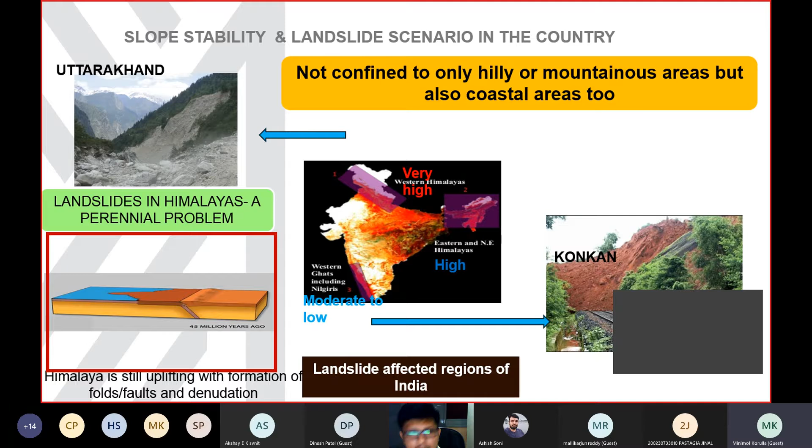Then we have challenging slopes in the Konkan region and in South India, especially the coastal slopes. Here the height may be less than in the Himalayan situation, but the soil properties are equally complex. And even within the northeast or northwest, when we move from place to place, we will again see special characteristics.

So hence, no guideline or code can really standardize 100% of the characteristics of these slopes, and we will not be able to define a ready-made solution applicable to a particular category, because from place to place the conditions differ in terms of the soil strata, the geological behaviors, the geotechnical characteristics, the load combinations.

These are photos. I'm sure you may not be able to see them closely, but it is very important when we talk about any slope instability to get maximum visuals. A site visit is required, but nowadays we can get a lot of very good digital images, and those can be used to understand a project deeply. So we can see landslides in Mizoram, Arunachal Pradesh, Assam, and Sikkim. Even in adjacent states, each place has some difference in characteristics. So when we go to a site, we need to collect as many photos, videos, and digital images as possible.

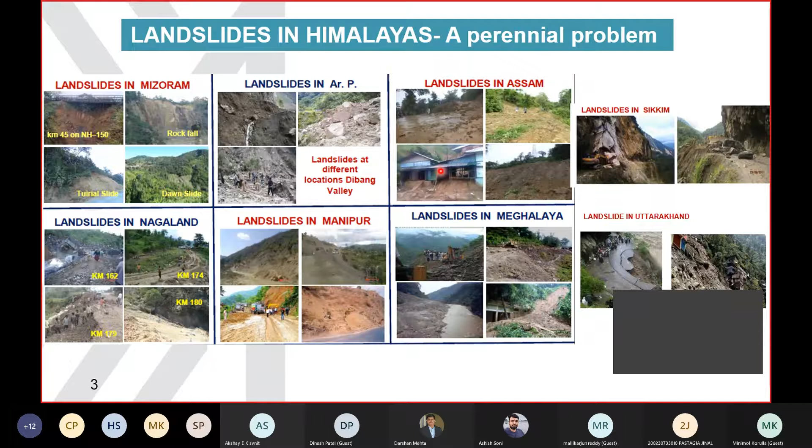So this is an example of a Himalayan landslide. This is a place called Lambagad in Uttarakhand. Uttarakhand is the Devbhumi, where nature is at the peak of its beauty. If we move through that place, we will feel that heavenly beauty. But at the same time, we feel the instability of the mighty Himalaya very much there, because everywhere we feel that we are walking on unstable ground.

So here, if you are watching closely, we can see a number of slopes, where my cursor is moving. There are hills, and what we are seeing is a river bed which has a lot of debris lying in the bed. And you may be able to see that a road is passing on one side. The hill is there, and the other side is the riverbank slope.

And if we are closely looking, a number of slopes can be seen. And if I describe in terms of slope stability, I will say that at present, from this photo, none of these slopes are stable. And what are the challenging forces we are seeing there? First of all, the height is quite high. The height is really quite big. Second, the steepness, the angle of slope, that really makes it unstable.

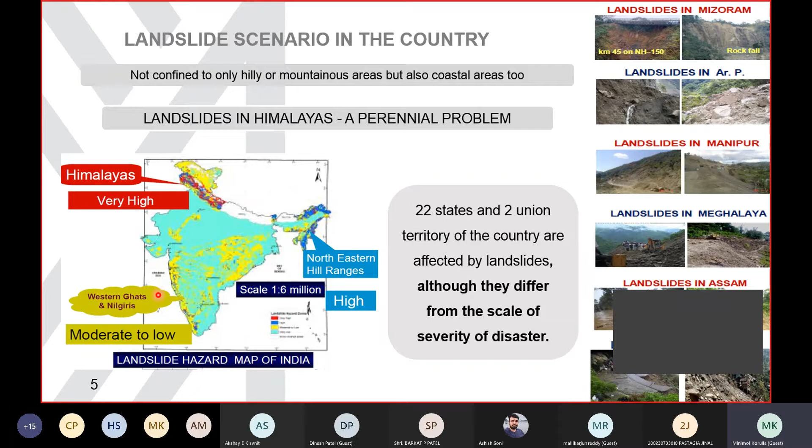So when we talk about the landslide scenario of the whole country, 22 states and 2 union territories of the country are affected by landslides, although they differ in the scale of severity of the disaster. And usually there are several classifications, but based on the hazard zoning, we can tell that the Himalayan states are the highest hazard zonation. Then the second category may be the northeastern hill ranges, which we can categorize as high, and for the Western Ghats and Nilgiris, we can tell the hazard rating is moderate to low.

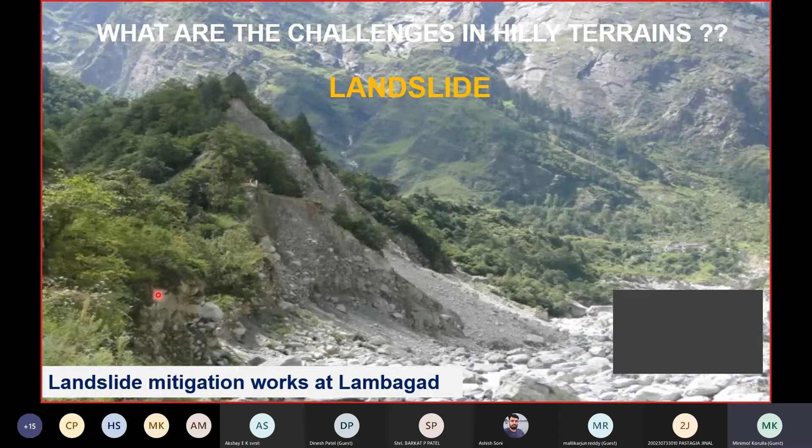So the landslide mitigation works in Lambagad were happening over the last 3-4 years, and we will see at the end of this session what are the different measures being adopted in Lambagad and similar types of stretches.

Okay. Now I am going to the second terminology which I used in the title of today's session. That is the rockfall. What is rockfall? Just as the word indicates, when the rocks are suddenly falling, most of the time under the force of gravity, we call it rockfall. So it is one type of landslide. But many a time when we talk about a landslide, a huge mass moving or sliding gradually is what comes to our mind.

Most of the time that may be the picture of a landslide, whereas rockfall also can create severe slope instabilities, and the difference is this is a type of landslide where rocks fall more vertically. It will get detached from its origin, and it will move.

It can be a projectile motion, or it can be a vertical motion as per the orientation of the strata, the height of the strata, the slope of the strata, and the size of the rock, the weight of the rock. So the motion can be different, but relative to a normal landslide, the rockfall motion will be more vertical, and many times it can become quite critical.

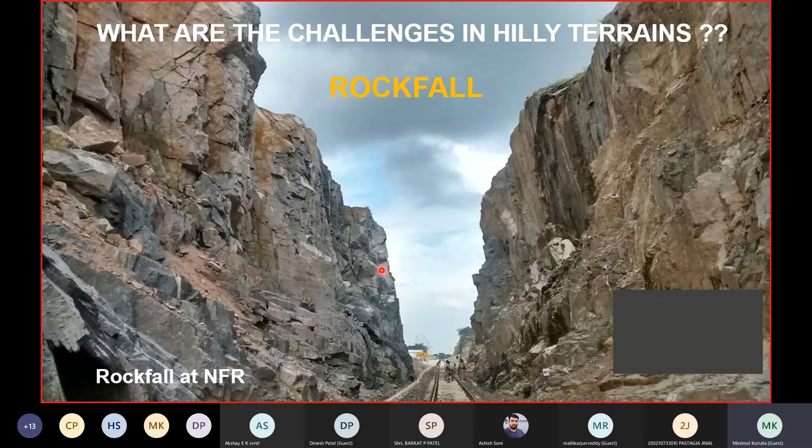In this case, this is a Northeast Frontier Railway stretch. The rockfall mitigation work is being done, and this photograph was taken before the mitigation methods were adopted. So we can see that if vulnerable rocks are there, that is definitely posing a problem, because the track is very near this vulnerable rock face, and any rock which is falling can cause a risky situation for the train as well as the passengers.

I talked about the subsidence. Due to toe erosion, when water bodies are passing through the toe of a slope, this type of subsidence can happen. This is in Uttarakhand. The toe is getting eroded and scoured, and due to that, there is a differential settlement, and the road is getting disturbed. And if we are just doing something at the top of the road, that is not going to help.

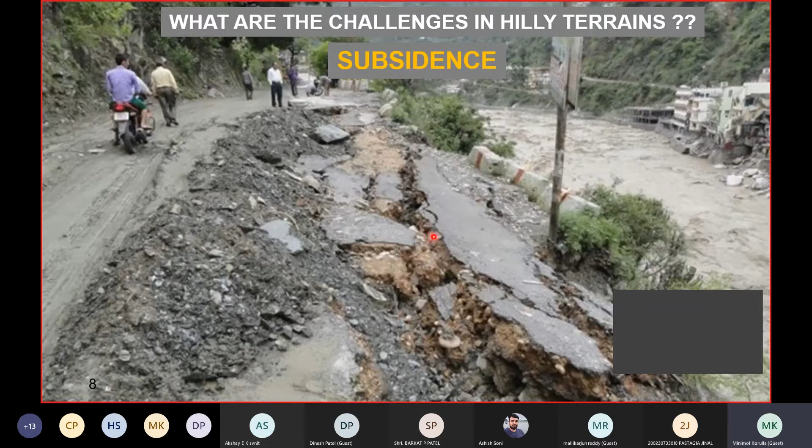The slope stabilization needs to start from the bottom of the road, or start from the riverbed. When there are very high levels of slope instabilities with a lot of uncertainties, that is avalanches. So when the snow is moving like a flood, we call it avalanches.

And there are mitigation methods which can be adopted. The main characteristic of most avalanche mitigation systems is that it is preferable to use lightweight materials for avalanche mitigation, because, like in the case of seismic activities, the moment we put heavyweight material, that can cause or trigger more risky situations.

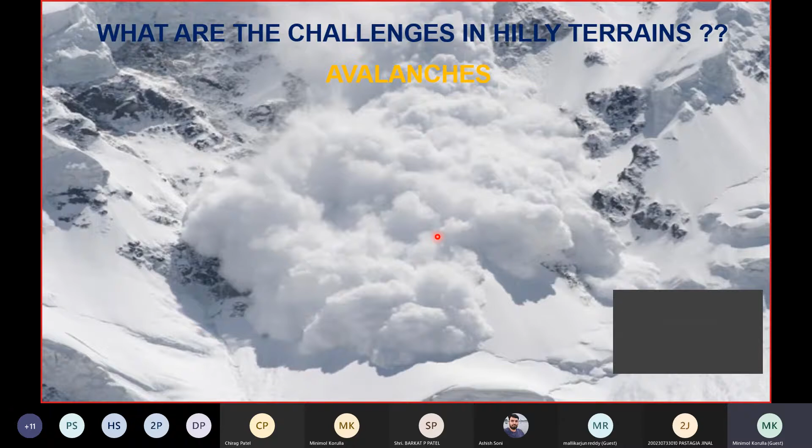Now, one more type of slope instability, that is debris flow. Debris flow is again a water flow, but with a lot of debris, rock fragments, and the energy it carries will be quite high. When the water comes with the debris, usually it comes with a very big sound. That energy we can feel with its sound and its movement, and this type of debris flow will damage all infrastructure, men or animals in its path.

We have already seen that steep gradients, the steepness of the slope, can trigger a slide problem or a slope instability problem. This will be valid especially when we compare a slope which is more than the angle of internal friction of a cohesionless strata. So suppose we have a strata where cohesion is not very dominant and angle of friction is the dominant factor, and if we make a slope there steeper than the angle of friction, then definitely we all know that will not be stable.

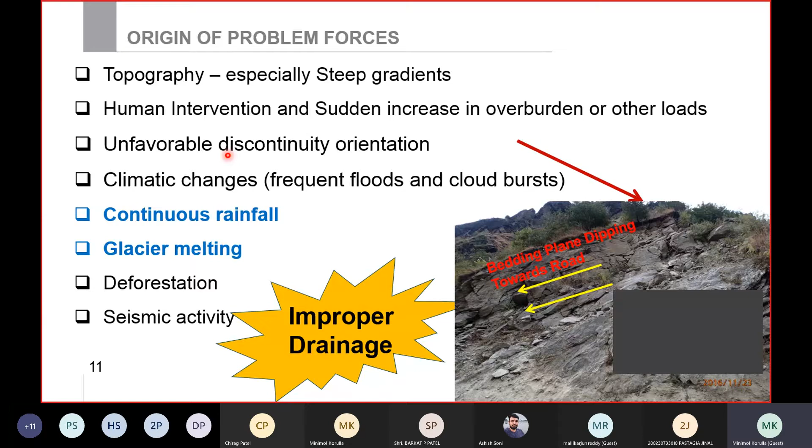Finally, deforestation and seismic activity. This I think we all know from our primary classes. Tree cutting causes erosion, and continuous chain erosion will cause severe slope instability. And seismic activity, the dynamic vibrations happening during seismic events can make the slope unstable, especially when slopes are not designed, or are designed partially without considering the probable dynamic loading.

And destabilizing mechanism, we may have to go into the depth of it, whether we are using innovative material or whether we are using conventional material. Each of the mechanisms itself will be having sub-mechanisms. Okay? 6 or 7 failure mechanisms we may be able to define in each of these types of causes. For example, we were talking about the debris flow.

So this is a typical flow diagram of a debris flow event. It starts from the hilltop and it's moving. Okay, when it moves the overburden material from the uphill slope, that is moving with water, like the surface runoff and natural channels on the slope surface. The debris flow which has happened here has disturbed everything, and finally it is reaching the small stream in the downstream. So in the whole path, it is disturbing many slopes or many strata.

And if we have to protect, it may be a very expensive type of solution. If we start from the top of the hill up to the bottom, that itself may be 1.5 kilometers. In the photos I have shown here, it is ranging between 1.2 to 1.5 kilometers. So it is impossible to spend a lot of money on the entire path, but we can do something. Near the origin of this debris flow, if we can place certain energy dissipation barriers, then definitely the damage this debris flow is making will come under control.

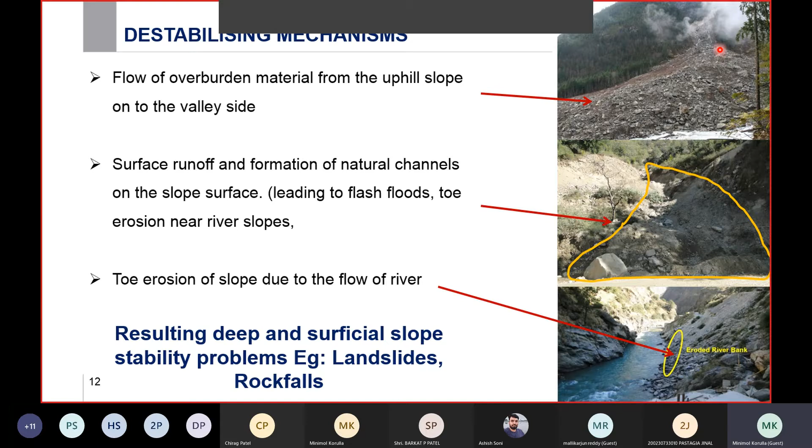Okay. Now, factors triggering the landslide. This is taken from IRC 15, which is not a new code or guideline. It is an old state of the art report published by the Indian Roads Congress, and for the few guidelines which came out in the last 5 or 6 years, a lot of cross reference we can get from this IRC 15. It is a very beautiful state of the art, and in that this type of flow chart is there which divides the different types of factors.

So for the slope instabilities, the division is natural factors and anthropogenic factors. We have already talked about this. Anthropogenic factors are deforestation and improper land use by people. And the natural factors we can categorize as inherent factors and external factors. What are external factors? External factors are seismic forces, rainfall, melting of snow, volcanic eruption; all these are external factors.

Whereas the internal factors of the slope are the type of rock, the geological features, the structure, the slope, the hydrogeological condition, that is the subsurface and surface flows, and the geological condition, folds, all this will come in that. And then finally the geotechnical parameters, the shear parameters, C, phi, the density, the bulk density, everything will come in that.

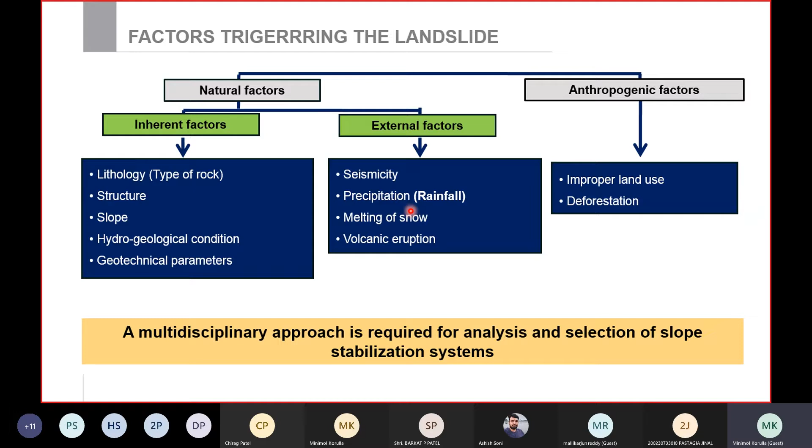So, IRC-SP 106, this is a relatively new guideline. New means I think it came out in 2014. This is talking about the approach towards the investigation of landslides. Okay. So see, I mentioned that the slope instabilities in a landslide are of a higher scale. Compared to a normal small 6 meter slope slipping, a 60-meter Himalayan slope undergoing a landslide is quite incomparable. Okay, but whatever it is, in the investigation of the landslide, what should be the approach?

So usually we can divide the investigation into two categories. The first is preliminary investigation, and the second category is the detailed field investigation. Preliminary investigation, again, we can divide into two. One is desk study. Desk study means, sitting in our own place, how we can study a slide which occurred in a distant place. Okay. So now with all this COVID and doing everything digitally, we can really connect with it. All right. But this is accepted as one of the first preliminary approaches when we are deriving a conceptual scheme for landslide mitigation.

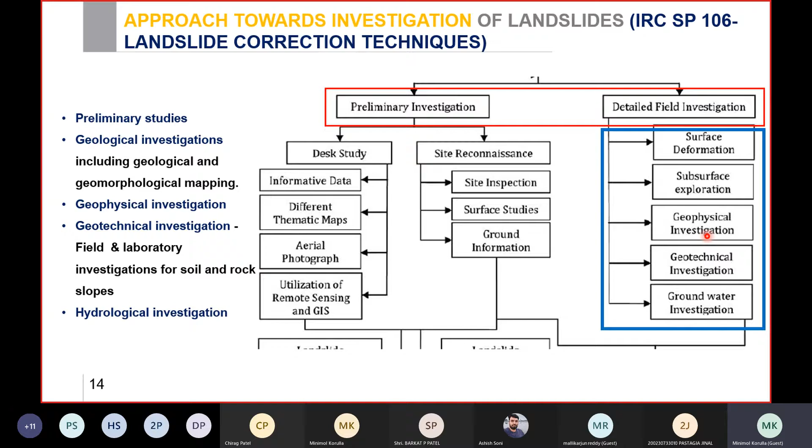And from the first one, desk study, we will end up with a landslide susceptibility map. From the desk study, from the various photographs, from the various videos, the digital images, we will be able to find out which are the vulnerable areas, which can create problems, and which are important from the point of view of saving men and infrastructure, which need to be protected and stabilized. So the landslide susceptibility map we can find out.

The next is the hazard zonation map. Even after the susceptibility, through the site visit, we can clearly define which is critical, which will cause a hazard, which will cause a risk at the highest level. And the risk assessment map, how much risk is there. And once we are seeing that high risk is there, then only somebody will go for a detailed investigation.

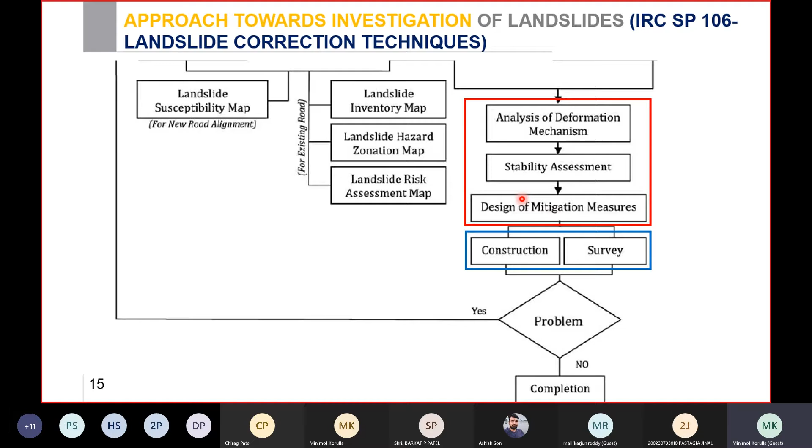And in the detailed investigation, from the different observations and geophysical, geological, geotechnical and hydrological studies, we will be able to understand what can be the deformation mechanism, how much movement can happen, in addition to all the other types of failure mechanism, like sliding, overturning, foundation bearing pressures, bearing capacity failure, settlement failure, everything can happen. But one is very important, the movements. Then stability assessment needs to be done, and finally the mitigation measures need to be designed.

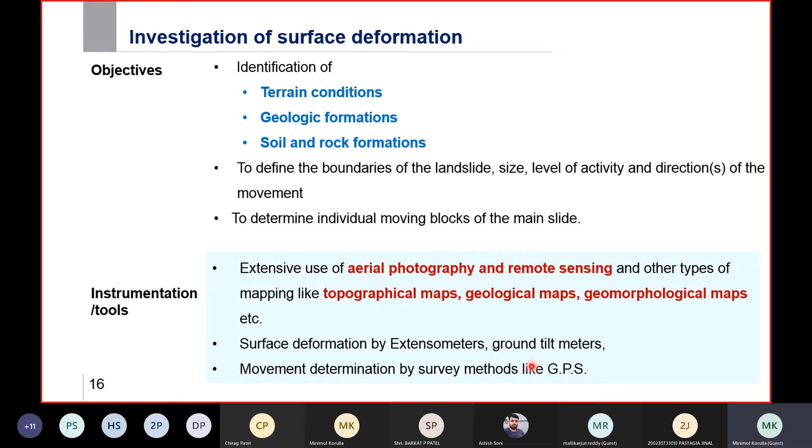So as I told, it is very important to understand the surface deformation and the different ways of understanding the surface deformation. So photography as well as remote sensing as well as the geomorphological and geological maps all will help. But it will be quite helpful if we can employ some type of instrumentation like extensometers or tilt meters. These can closely show how much movement the ground is having right now, and especially the relative movements in different climates, different conditions, how the relative movements occur, that can be plotted.

Another investigation which needs to be done is geophysical investigation. So when I talk about my theme, the innovative materials for landslide and rockfall mitigation, I would like to clarify that the innovative materials and technology I am going to refer to are mostly flexible types of systems. Flexible systems means something which, even after installation, will be free to move, free to move more frequently, and it can accommodate a lot of movements.

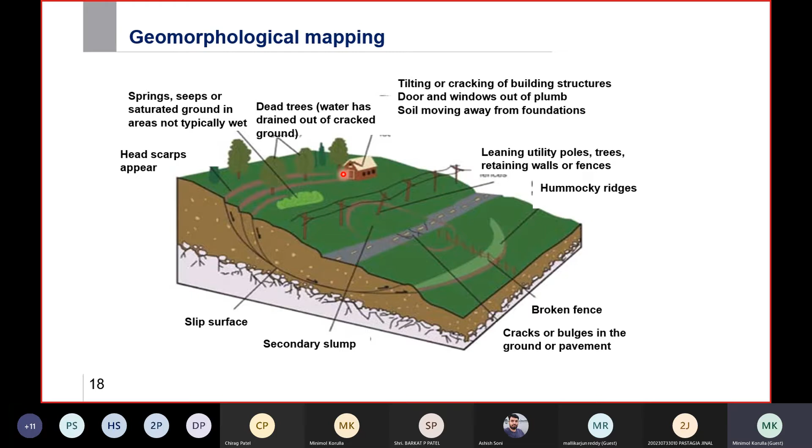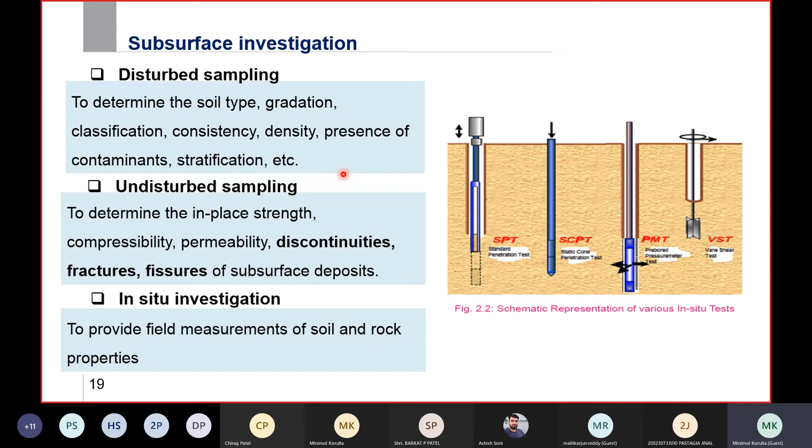Then in our normal geotechnical investigation, we can do the investigation by disturbed sampling. We will get all preliminary behavior like soil type or rock type or gradation or consistency, density; all this we can find from the disturbed sampling. But we may require to go for in-depth analysis like the shear characteristics from a triaxial test or compressibility or the in-place strength, all these from undisturbed sampling. Okay.

So, in the geotechnical investigation, one major identification is whether it is a soil or whether it is a rock. Okay, so this is fundamental. Again, if we are going for a conventional system or innovative system, this knowledge needs to come. And if it is rock, any slope we can cut. That is a very wrong understanding, because sometimes the rock can be quite vulnerable and it can create more problems than the soil.

So if we are going for a rock, again rock sampling and rock characteristics are to be collected and identified. And for the soil slope, we already talked about the different types of tests to be conducted, like shear strength, then permeability, the grain size distribution, the densities. So all the normal tests we take for slope stability analysis need to be taken even for a landslide or rockfall prone area.

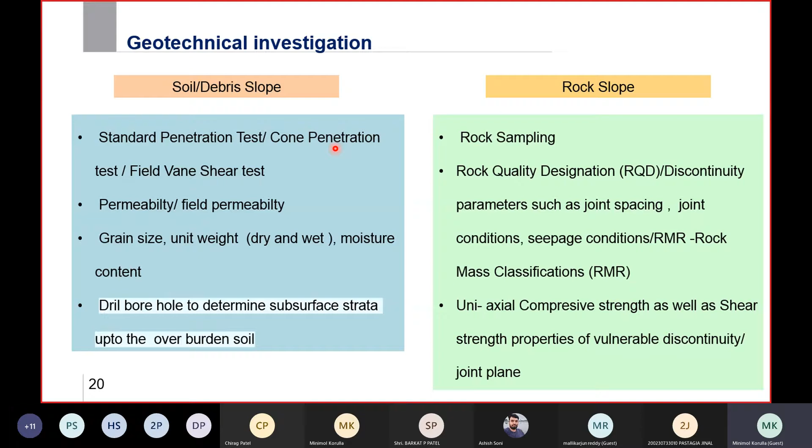But the most important is the hydrological investigation, and that used to get neglected most of the time. In the projects I was involved in, many of the slope analyses, I used to see that in the whole set of data coming from the site, if we ask about the hydrological data, it's like a big nil. Normally people will say, oh fine, rainfall intensity, you assume it, or what is the infiltration capacity of the soil, you assume it. But it is not a very big challenge. If we have the will, we can do it.

So for the hydrological investigation, one of the primary data required is the annual rainfall for a particular time. Ideally go for a 100-year return period, like over the last 100 years, what is the maximum rainfall intensity that happened and for how much time. That is one of the most primary data required. The average and highest deviation of rainfall as well as the intensity per hour are also important.

Another important feature is the characteristics of the catchment. And for that, first we have to identify the catchment area. Somebody going to the site has to map the catchment area and understand how much is the possibility of surface flow and subsurface flow, and to differentiate between the two, how much water can go inside the soil, we need to understand the infiltration capacity of the soil. If we know the gradation of the soil and the slope of the area, and if the mapping involves contour mapping, then we can find out how much infiltration can happen.

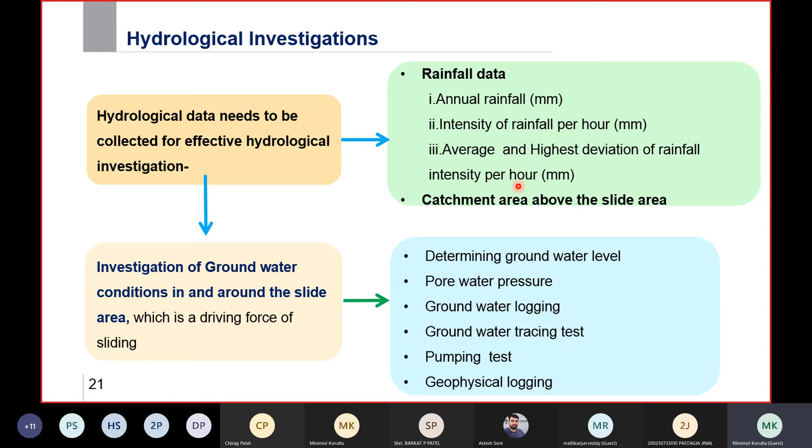And nowadays drones and such tools are available, so it's not a big deal to get the complete catchment area mapping.

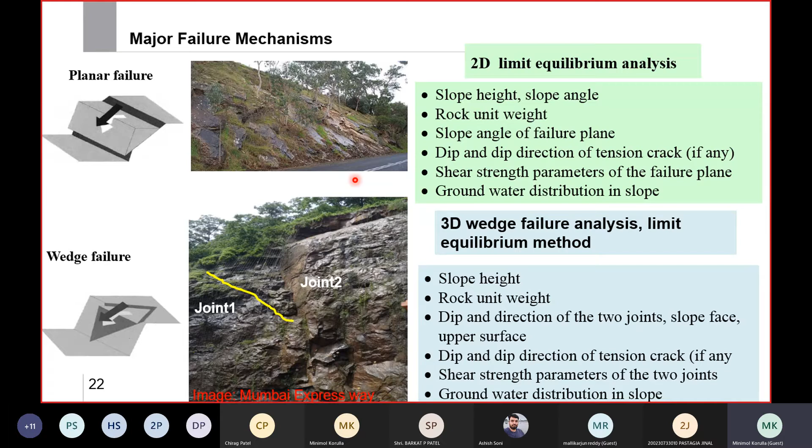Now coming to the rock slopes, different types of analysis are possible. There can be 2D limit equilibrium analysis as well as 3D wedge failure analysis, and depending on the rock characteristics one can decide what type of analysis is to be done. Luckily we have good rock mechanics specialists in the country at present, and many softwares are available. Even without a very deep understanding of rock mechanics, with our normal civil engineering awareness in geotechnical, geological and hydraulics, one can employ rock mechanics software and have a good analysis for understanding slope stability.

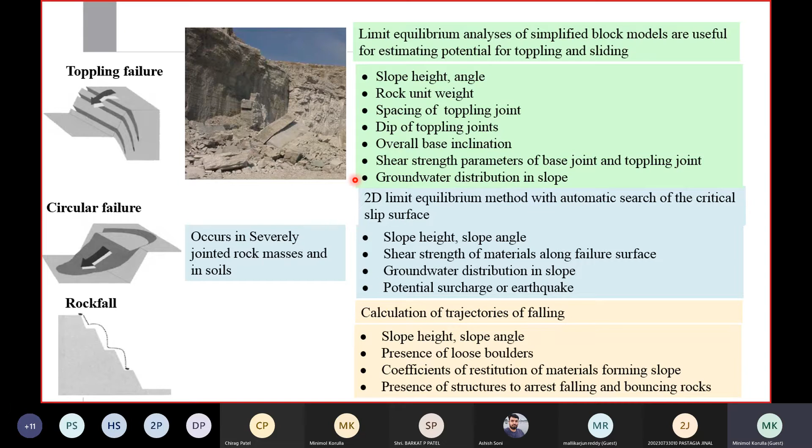But for a civil engineer, something which always helps us is common sense. As I mentioned, we don't have to understand the rock mechanics aspect very deeply. Still we can do a rock slope analysis. Those types of software are available; if we have the right observations from the site and a preliminary understanding of what type of rock and what type of failure can happen, with common sense, we can feed the data into such software and understand the failure mechanism the software defines from its output. So it is a big topic. I am not going into the depth of it.

Now coming to if it is a soil slope. So if it is a soil slope also, it may not be as deep as the rock slopes, but even in that case also the different types of failures can happen. For example, this is a simple slope. Even in this simple slope, we have to see that apart from a global slip, what are the other failure mechanisms which can happen? It can be a base failure, or it can be a toe failure, or it can be an overall failure. So the judgment will be supported by the theoretical analysis.

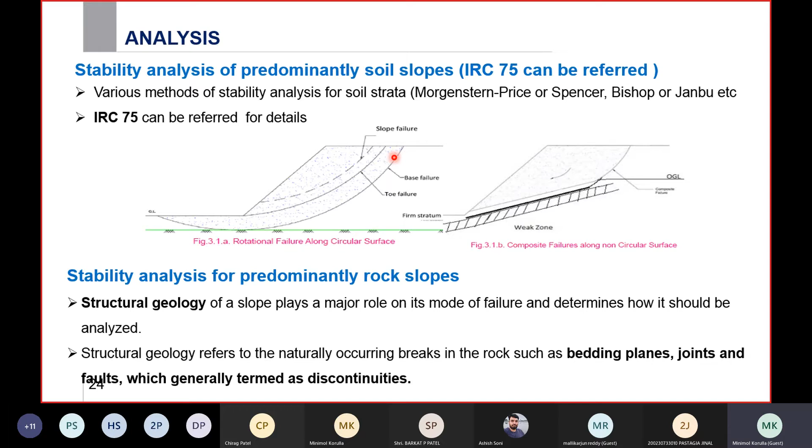And one particular guideline which I will recommend for all of you, if we have to understand deeply about the failure mechanisms, that may be the IRC 75, which is describing very deeply the different types of failure mechanisms which can happen for the soil slopes as well as for the rock slopes.

So now I am jumping actually to the materials which are available for making the rock slopes, I will not say stable, but protected. Because many of these materials are not completely stabilizing, but they may be protecting from the deterioration, and in a way preventing a complete deterioration and final collapse or destabilization of the slope.

So the first family of the protection work, not stabilization, protection work, I will call the simple drapery system. What are drapery systems? I was hearing Dr. Jimmy speaking about the different types of erosion control mats. So I will say that these erosion control mats are drapery systems. The drapery systems are something which we can drape on the slope surface.

So for an erosion control mat, we will go for lighter, softer and more flexible materials like coir mat, jute mat, or polypropylene mat, or polypropylene mat reinforced with geogrid or steel mesh. All these can be used for draping a soil slope. But when it is a rock slope, if we just drape a jute mat, the jute mat gets torn or punctured by the sharp edges of the rock.

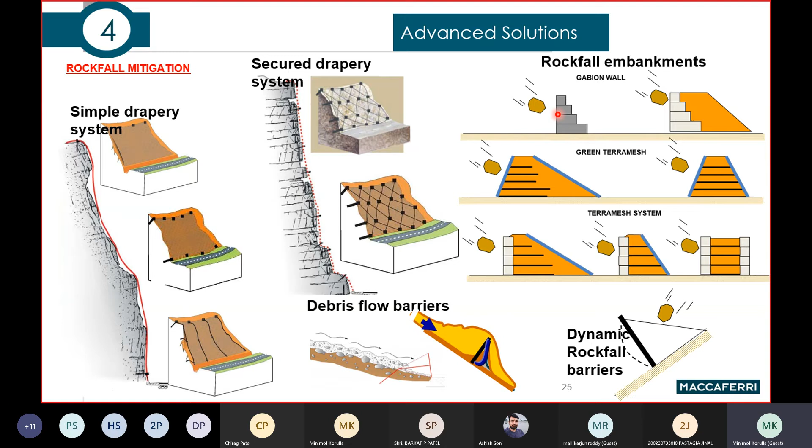So they have decided to go for nailing, soil nailing, because the strata is having some hardness, some strength is there. So they thought of increasing that inherent strength, and the fascia will be provided with the gabion.

So the advantage of gabion, especially mechanically woven gabion, is that it can be interconnected with each other. So the entire gabion will be acting as a continuous monolithic structure, and the anchor points will be through the gabion. So a proper connection can be established, and the fascia is completely free draining. So it will not allow any pore pressure to develop. The water will come out.

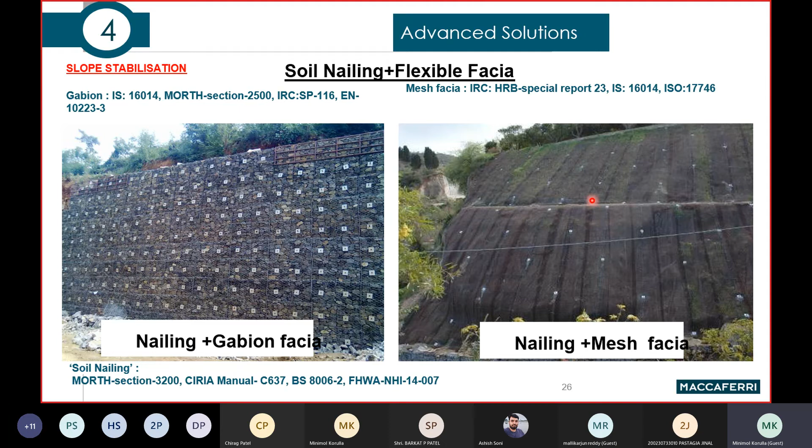So in some cases, when we are doing the soil nailing for the slope stabilization and all, we can go for erosion control mat. So you have heard from Jimmy Thomas' session the different types of erosion control mat: coir mat, jute mat, or the polypropylene mat, or polypropylene mat reinforced with a steel mesh or geogrid. All these can be done. The guidelines covering all these products, from the conventional coir mat or jute mat up to the most modern three-dimensional mat or geocell, are described in some guidelines.

One of the guidelines which is covering the details of all these types of system is IRC 56. IRC 56, and there is a MORTH specification, Ministry of Road Transport specification. Their section 700 is speaking about the different types of erosion control mats. Section 700, I think table number 7, if you want, you can note down. Table number 7 is describing the selection of different types of erosion control mats.

For example, if the slope is less than 45 degrees, we can go for coir mat or jute mat. 45 to say 55 degrees, we can go for a two-dimensional mat. 55 to 65, we can go for a three-dimensional mat. And greater than 65 degrees, there we have to go for a steel mesh or a geogrid mesh to be extruded through the erosion control mat.

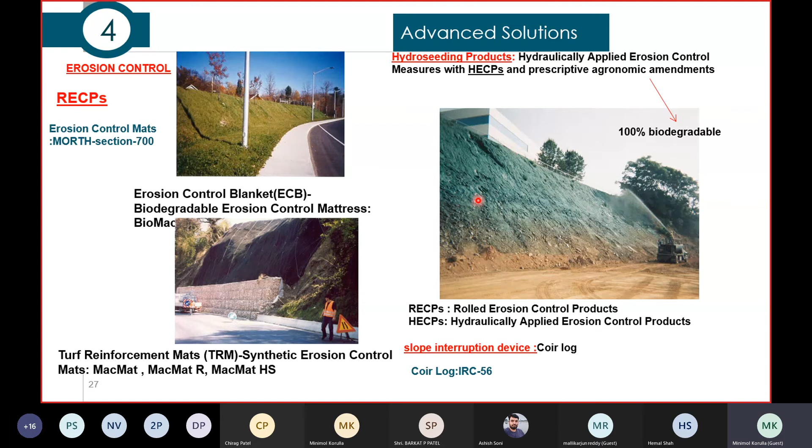in the soil. So agronomical tests may have to be done for certain types of soil to see what is lacking or whether acidity or alkalinity needs to be neutralized. So in those cases, that type of neutralization or addition has to be done, and then we can go for any of the bioengineering methods or erosion control methods. And in some cases, hydroseeding, after this type of erosion control mat is provided, because just planting may not work.

We may have to go for hydroseeding. What is hydroseeding? We are applying the seeds with water. Okay, so hydroseeding is a process. Maybe it is a little more costly than the normal type of seeding, but it will ensure quick and thick vegetation growth.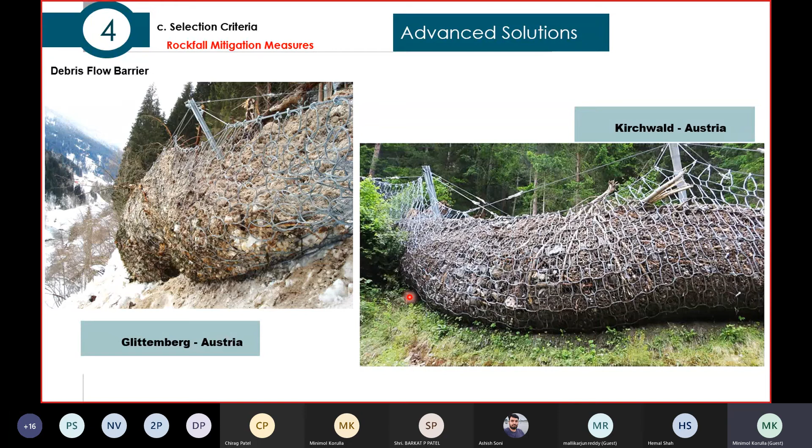But among all the types of steel meshes available in the world, at present the maximum strength is associated with the ring net. I mentioned the guidelines which are available, like ISO 17745, which is Indianized also; we do have an Indian standard. So the ring net has the maximum strength and maximum stiffness. That is why it has bent this much. That flexibility is there. It is not ruptured anywhere.

Now coming to reinforced soil: we have seen that we can create certain rockfall embankments with the reinforced soil system. Dr. Jimmy Thomas has already covered the use of geogrid in reinforced soil systems, so I'm not going into the geogrid part. I want to talk about the fascia systems. When we are creating a reinforced soil system for slope instability, especially in an area with a lot of landslides, the first, second, and third cause may be water. So a lot of surface and subsurface flows are there.

In this case, in Himachal on NH21, reinforced soil of height 12 meters to 31 meters is constructed with a flexible fascia. So what fascias are being used? The geogrid is going inside. The fascia is made with gabion with an integrated tail. Gabion is a wire mesh box filled with stones, and when each block is connected to the adjacent block, we get a totally integrated structure.

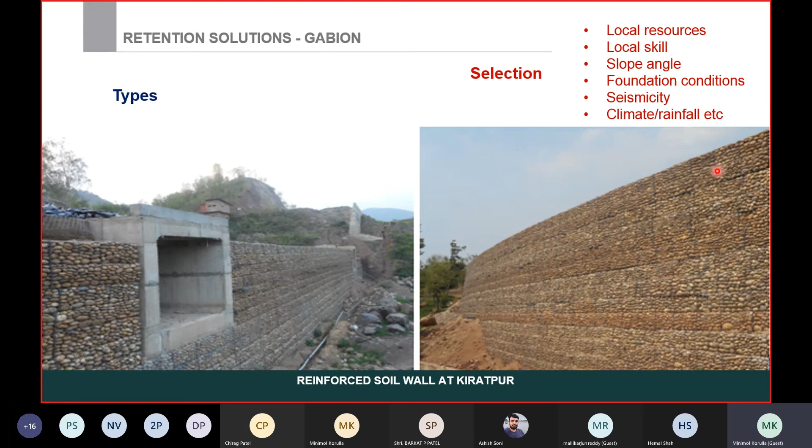Suppose it is 20 meters high; the geogrid will be some 14 meters. For a 20-meter-high structure, 14-meter reinforcement goes inside, then a fascia is made of gabion, and the bottom panel is extended into the soil as secondary reinforcement. The geogrid inside the soil is the main reinforcement, but the secondary reinforcement and the fascia are an integrated unit. So this is what I was speaking about.

The geogrid part, as Dr. Jimmy has covered, I'm now talking about the design of that part. The main design for a geogrid as reinforcement is usually rupture and pull-out, internal stability, external stability, sliding, overturning, and bearing pressure like any other retaining structure, and overall global stability also has to be there. But what is the criteria for the front face?

Here this illustration is showing the bottom is a gabion with the integrated tail, and the top will be a green fascia where just a weld mesh and woven mesh and vegetation will come. So what is the criteria for the fascia portion? These are all steel. The fascia is completely steel.

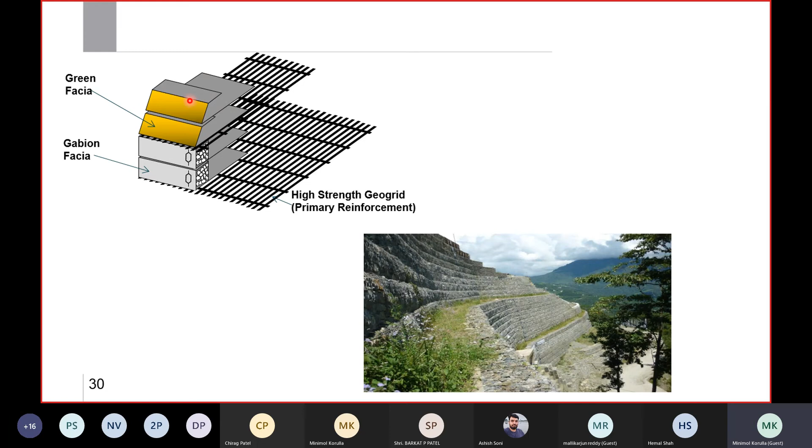So for any fascia which we are combining for a reinforced soil, the fascia has to be designed for the local stresses which are coming. The main forces, earth pressure, the surcharge load, the seismic load, traffic load, everything will be taken care of by the reinforcement which is going inside. But the unbalanced force which is coming at the front face, that will be taken care of by the fascia element.

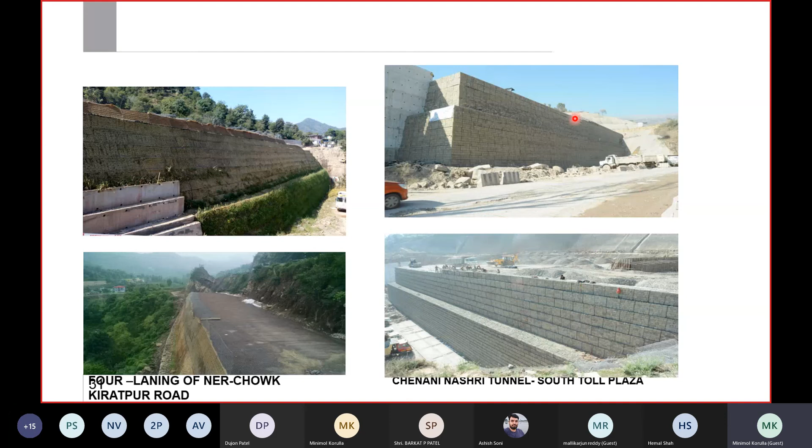So these are some of the other images of the case studies. This is again Kiratpur in Himachal Pradesh. This is in Jammu and Kashmir. There we can see the green fascia. Okay, this is in South India. I am not supposed to reveal the name of the structure because there is a confidentiality agreement. But this is an 88-meter high structure. This again is to show the slope stability.

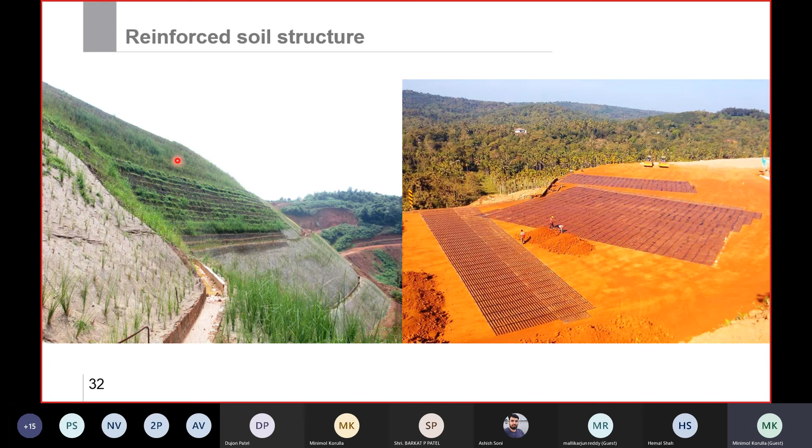Of course, this is also a geogrid reinforced structure, but the slope stability is taken care of not only by the geogrid which is going inside, but the steel front fascia which is facilitating the vegetation growth. So these are my last slides. Quickly we can see that this is in BRO, Border Roads Organisation, which is done in the northeastern states. They have done this protection work.

There is a gabion wall, you can see that just a road is going. So to the valley side of the road there is a gabion wall, and it is standing on the top of a rock. So the rock is stable, geotechnically stable, but the rock was having a lot of vulnerabilities. So a steel mesh, which is called a high energy absorption panel, is used as a drapery system, and

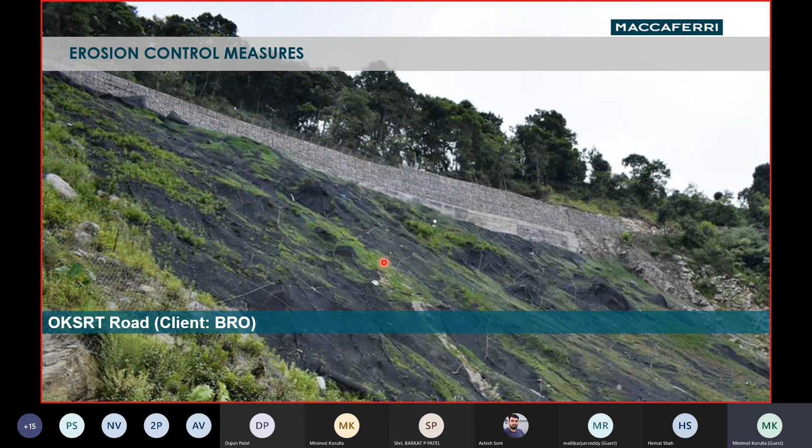nails are given intermediately. You will not be able to see the nailing points, but a lot of surface nails are there. And drainage systems are provided because some seepage was noticed through the rocks. So some subsurface drainage facilities are also being provided. This is another structure.

Now from the Himalayas we are in central India. This is the Mumbai Pune Expressway near Adoshi Tunnel. The client is Maharashtra State Road Development Corporation. So this is during the installation of the rockfall protection drapery system. I mentioned the secure drapery system. It is not preventing the rock detachment. It is not stopping the rock movements, but it is holding the rocks together. So we can see that the steel mesh is being spread, and a lot of small nail points are there.

I'm not sure whether you can see here, steel barriers are provided because some 100 to 200 meters at the top, a lot of trees are there. If we have to spread the mesh everywhere, we have to cut the trees, and it will increase the cost to a greater extent. And why did MSRDC do this in 2015 and 2016? They did it because during the monsoon an accident happened here. By rockfall 4 or 5 people died. So immediately they had to do the protection work and stabilization.

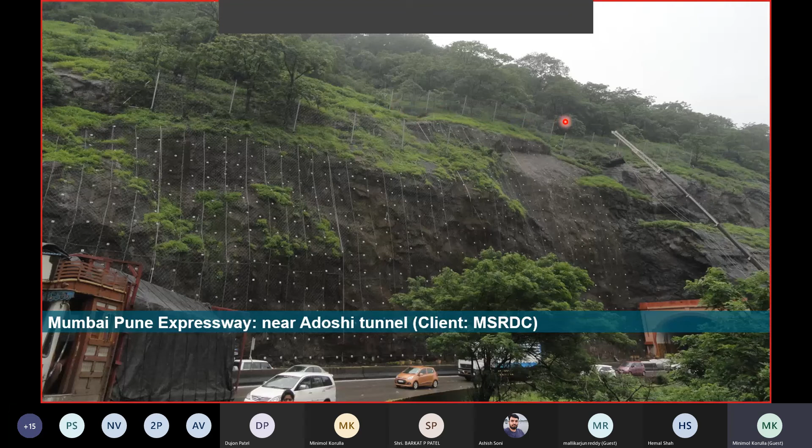So within a few months itself they spent almost 40 to 45 crore for this type of rockfall prevention and protection work, and to establish these rockfall barriers. This is another structure. It's a very interesting structure. These are the rockfall protection measures at Saptashringi Temple, Maharashtra. This is in Nashik. This temple is quite famous.

In June and July, a lot of pilgrims used to come here. And from this hillock the rocks used to fall. The most important part of the temple got damaged, and sometimes the pilgrims who were visiting were also getting affected by this rockfall. So a number of rockfall barriers were placed at different heights, and the high energy absorption panels were placed just above the parikrama path of the temple.

On YouTube, if you type Saptashringi temple slope protection works, you can get the details of these different systems, the rockfall barriers, and the capacity of the rockfall barrier. I remember it is 5,000 kilojoules, the rockfall that can be prevented by these barriers.

So when a rock is falling, what can be the projectile path. Nowadays there are different softwares which help us find the rockfall projectile path and where the rockfall barriers need to be placed, and whether a 5,000 kilojoule, 6,000 kilojoule or 7,000 kilojoule barrier has to be selected.

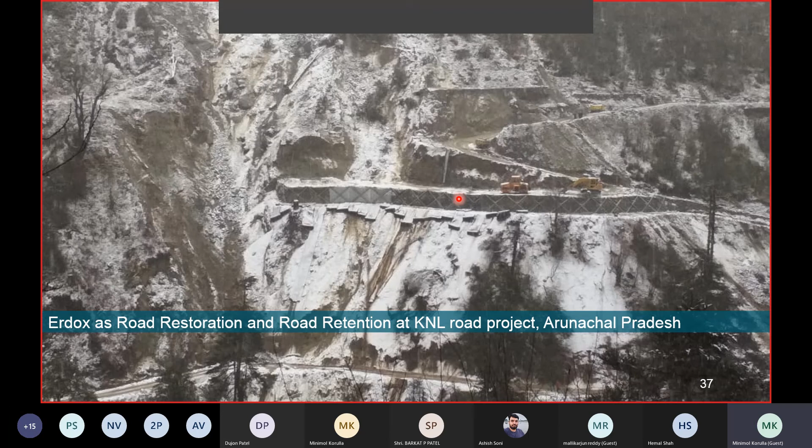When a disaster happens, immediately we have to construct a retaining wall of, say, 300 meters. We can use this type of system. It's like an umbrella, it can be opened, anchoring will be there, fascia will be there. You may have to fill using the backfill, and it can be used. Its limitations are there. We can go with this type of umbrella system only 5 to 6 meters, but the advantage is that it can even be used as an avalanche protection measure.

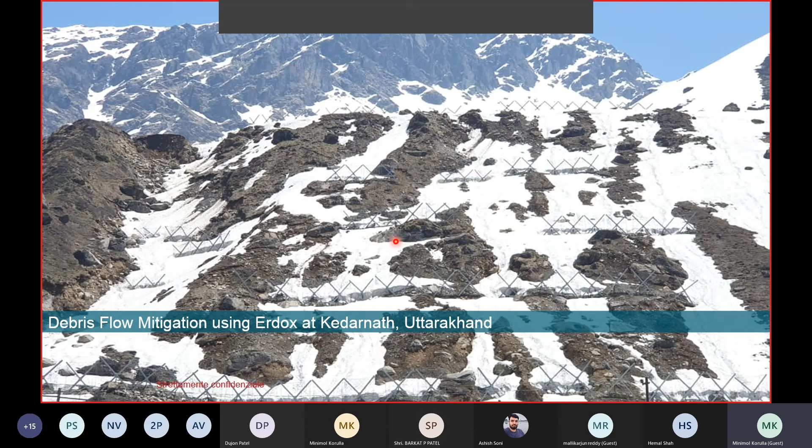This is in Kedarnath, Uttarakhand. This umbrella system is used for avalanche mitigation.

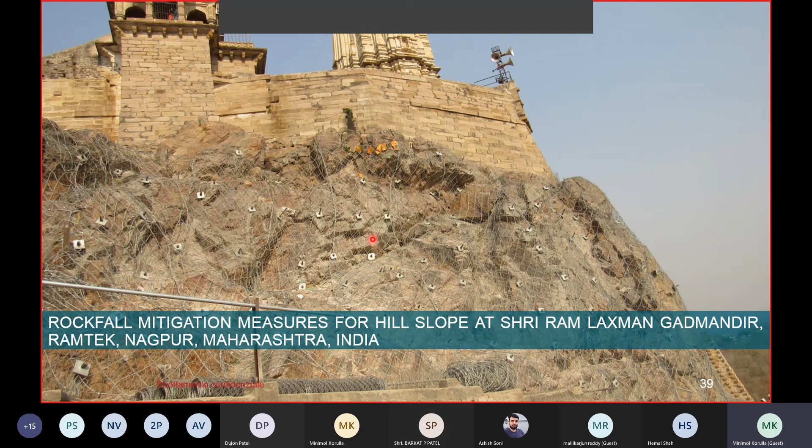And the last one is a Himalayan case. It is a hydroelectric power project, Chamoli in Uttarakhand. Here also very deep nails were being used, 20-meter, 25-meter deep nails, and a drainage system. The horizontal drains, extending up to 15 meters, 20 meters and all, are inserted. And there you can see the climbers placing the anchors as well as the high energy absorption panels.

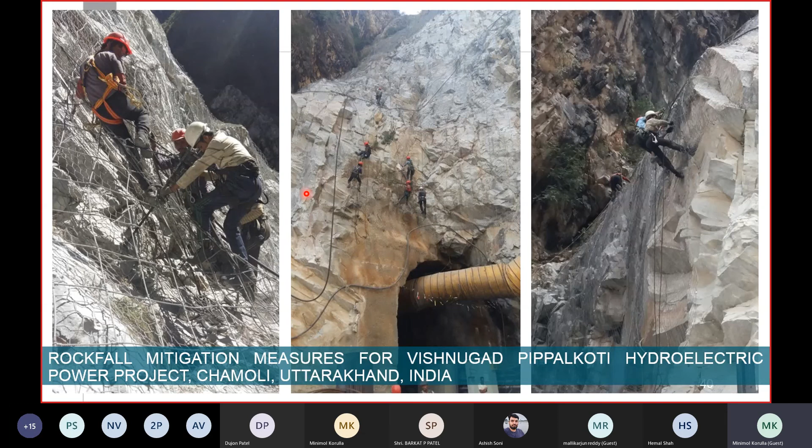So if you want to know the details of all these types of drapery systems, high energy absorption panels, steel grid, the simple drapery system and all, look into ISO 17745 and 17746 as well as IRC HRB 23. Yeah, this is again the close-up of the Vishnugad Pippalkoti hydroelectric project.

So the summary: for landslide mitigation a multidisciplinary approach is required. It is not just geotechnical or geological. It requires hydrological analysis, sometimes rock mechanics analysis, even with the basic information. Multidisciplinary approaches and multiple specialists are required. Flexible structures are mostly adaptive structures. That is their advantage, especially in places where a lot of movement is there.

Rockfall protection, drapery systems and barriers are in use now in India, and the required references and codal guidelines are available. A lot of case studies are also available. Erdox or umbrella systems are an emerging emergency system. This umbrella system I talked about has, in the last 5 years, been getting more and more popular in India. Erdox is a brand name, so forget about it. For deep stabilization, deep nails and deep drainage systems shall be used.

Micropiles, I have not gone into that, but if very high movements are there, if you are doing just deep nails, horizontal deep nails or fascia systems or soil reinforcement, that may not be enough. We may have to go for other types of measures like micropiles or beam creation at the valley side, or a shored MSE wall, shored mechanically stabilized earth wall. Those types of systems may be required.